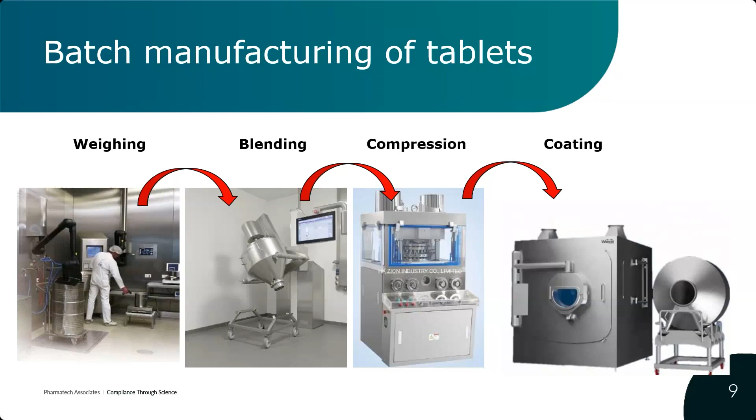And then after the coating, the final release tests will happen that release the product to go to the packaging area. Now, in some circumstances, it is possible that there are flow issues or segregation issues.

And in that case, a dry granulation or roller compaction step is often added, where the powder mix goes between two very big rolls that press the powder together and create a ribbon that is formed. This ribbon falls apart into flakes that can be milled to the correct particle size distribution.

If the blend has compression issues as well, a wet instead of a dry granulation step could be done to create flowable granules with good compressing behavior, and after that it can go to the milling step again. Like that, well flowable granules are being shaped and formed, and this should give good compressing behavior.

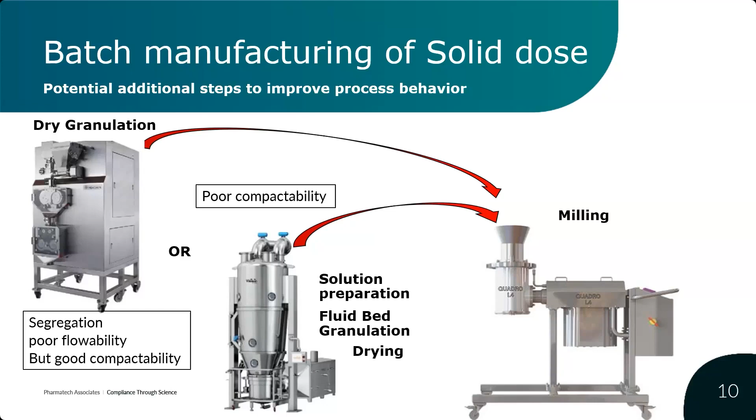Now, between all these steps, there's many days of testing needed. There's a lot of work to move the material around and handle the batch records. There's space needed for the storage of all the materials, and a lot of handling and transportation going on. So the cycle time of a complete batch process is very long to make solids, and it can be very cumbersome and expensive as a process as well.

Now, just imagine that if you could combine all these machines together into one large equipment train, you connect all these unit operations, you would be able to feed in all the material on one side of the line, and you would take out all the finished products on the other side in one go.

So you would not have intermediate storage. You would not have to test in between all the time. You would not have all those batch records. You only have one batch record at the end of the process.

And your batch size would then be defined not by the size of the equipment, but by the duration of the run. And that would be very beneficial. It would mean that you could define yourself how long you can run. You can make very large batches, very short batches, and it would all use the same parameter settings, which means that if you scale from your development into your commercial manufacturing, you would not have to change any parameters.

Also, during development, instead of having to make a new batch with each set of parameters that you want to test during your design of experiments, you just have to run very shortly. You can switch over to your next set just on the fly, and like that can do very fast and easy design of experiment sets with a very limited amount of material.

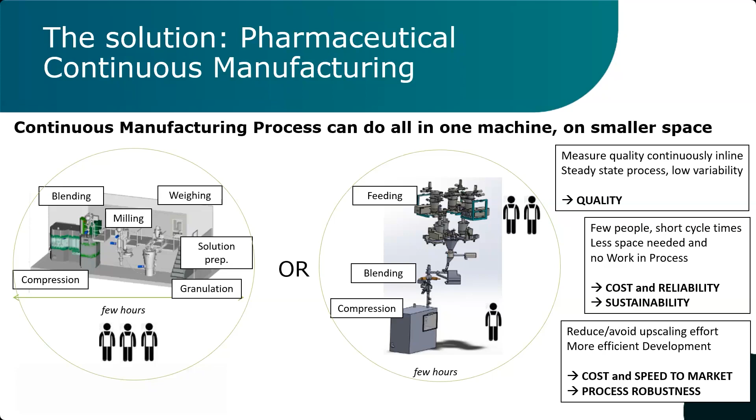That sounds wonderful. So in oral solid dosage, we have really seen that the facility size can be reduced significantly. And what you said, Lawrence, about faster time to market, I think that's also relevant for generics because of the exclusivity period. And if you're able to go to market sooner, that has significant economic implications.

When we look at the real differences between CM and batch, we already saw that in batch we have these individual unit operations and equipment, and you move your entire material one at a time through those unit operations. And we also saw a continuous line wherein the material flows from one end into the other. So definitely there is a sense of continuity in the material movement.

But if we go by the official definition, which the regulatory agencies have harmonized, a continuous manufacturing process only needs to have a minimum of two unit operations which are connected together and material flowing between them. So that means that a lot of the semi-continuous or so-called semi-continuous processes can also be considered as continuous manufacturing operations when you have multiple unit operations which are still being operated in batch.

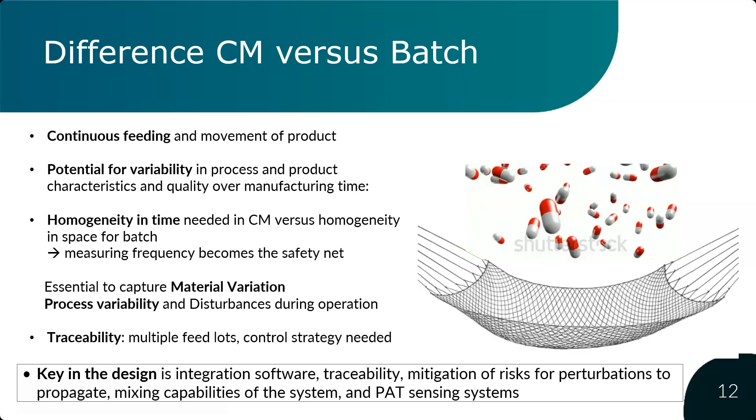When we look at the potential sources of variation, this could be a longer list, and this is a subset. It's very interesting because some of these sources of variation we don't have to worry about in big batch equipment. So you have incoming material feed, and you may have excipient batches coming from different vendors, or even different batches or lots of the same excipient, with minor variations in bulk density or particle size distribution.

To mitigate this, I heard one of the companies mixes 5 incoming lots together and homogenizes it, then feeds it into their feeders. That's an interesting approach they apply, but it depends on your material, what kind of approach you want to take.

Then there can be special causes for that variation. For example, electrostatic behavior is critical in powder flow. If the powder is very electrostatic, it makes it difficult for it to flow, and we'll see some of the effects later on. Also humidity. In powders, it's very interesting - powders can behave like solids, they can behave like fluids and flow, and they can also behave like gases, as in they can fluidize. Humidity has tremendous impact on that.

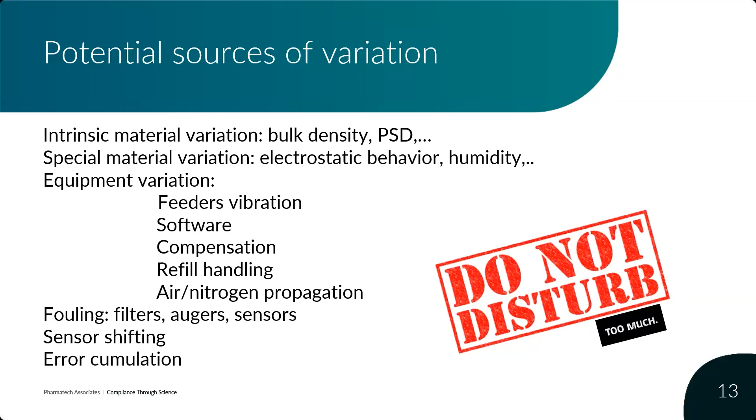Now, hearing Atul talk about the variation of a system, it becomes clear that feeding is the most important source of variation in the continuous manufacturing process, as it is the start of everything. But feeding is never perfect, and variation will always occur because you work with augers, because of the variation of materials, because feeders are moving and vibrating on top of very sensitive weigh cells, and because feeder hoppers need to be refilled regularly, so the weigh cells need to stop working

until the system is stable again. And so the measuring frequency and the averaging of the data that comes from the feeder by the weigh cells and by the software becomes very, very important, because if the averaging or the frequency is too long or too late, then the real fluctuations can be missed completely, and it can give a completely false idea that you would think it's constantly dosing, but in reality it is not.

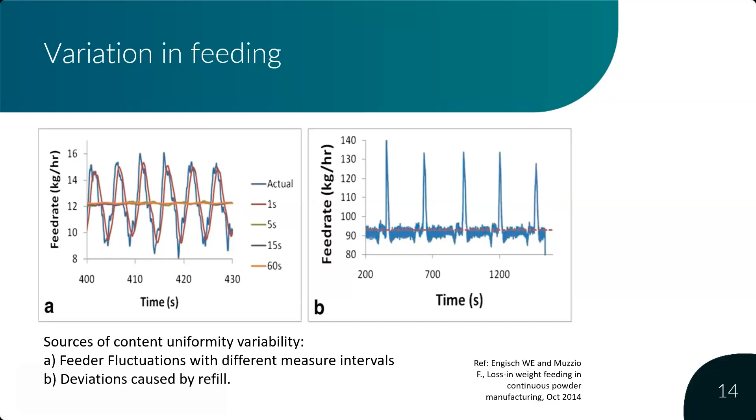Now, an overshoot of API from a feeder could end up in a tablet a few minutes later and potentially can damage the health of a patient. And so something needs to be done to mix all the ingredients and to minimize the impact of all this variation. All the time, in every continuous manufacturing application, an inline blender is installed.

Now, more mixing of that blender means blending out variation better, but it also spreads out more, so it will take longer to wash variations out. That's also not always ideal. So to find an optimum, the mixing capability of the blender for every formulation needs to be well understood.

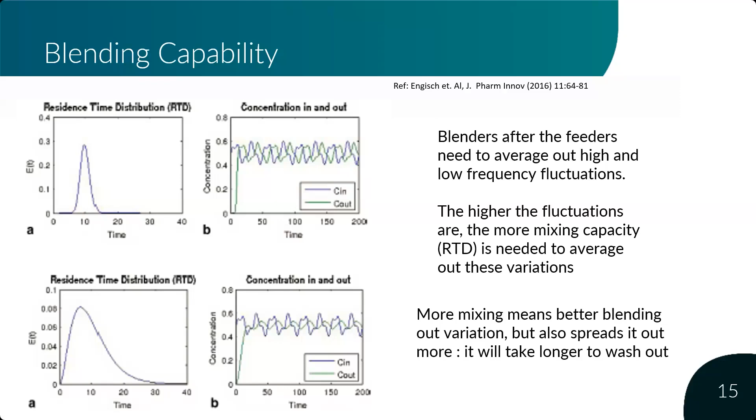And for that, how we do it, we call in a concept that is called residence time distribution, or RTD. Now, RTD is a probability function, a distribution function of the time that particles need to move through a section of the line. That describes how a particle behaves inside the reactor. First it's defined theoretically, and then it will be tested with experiments that prove the theoretical curve corresponds to reality. That's how it's done.

Now, after defining the RTD like this for an individual unit operation. Lawrence, before you move forward, I do have a question. Yes, Gabriela? Related to the tracer - what would happen if you do not use a good tracer? Yeah, that's the previous slide. It's a good question.

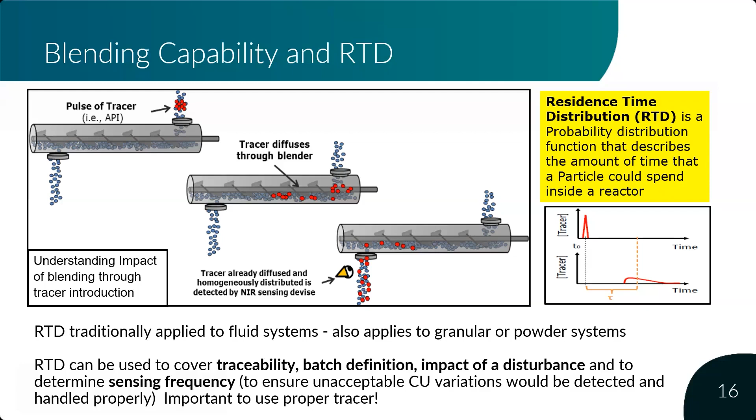Once you've done the RTD calculation for a blender, you can also do that for your compression machine, for other blenders, for other parts of your line, even a tube where material passes through. And then you're going to bring all of those RTD models together into a full line RTD. This will give you an understanding of how variation or disturbances propagate through the line from the beginning all the way to the end.

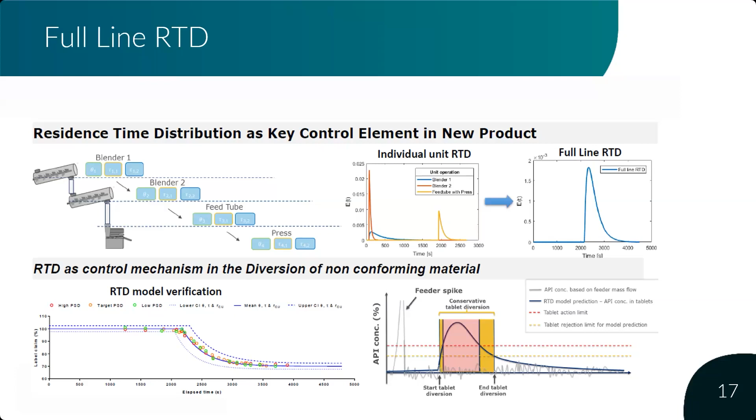All of this will give you a lot of information. It can help you detect a disturbance and know exactly when you need to open up your reject valve further down the line. It can also help you, if you find an out of specification result at the end of the line, to trace that back all the way to your individual sublots of excipients or API used at the beginning of your process. And it can help you identify what needs to be the sampling frequency, or the measuring speed, for other sensors in your line to assure you can capture all the variation of your process.

So what can go wrong in a typical CM train when we look at just the feeding unit operation? These are some good pictures that really demonstrate what can go wrong.

There are powder flow issues, as we all know. In a feeder, typically we have a screw auger that is conveying the material out of a hopper. And if the material is too sticky and it sticks to either the auger or the walls of the feeder, it can create challenges. So you could have clogging, you could have obstruction to the flow.

The properties of the material, such as cohesive properties or electrostatics, particle size distribution, and surface energy, are measurements or properties that impact electrostatic or cohesive behavior. These can create phenomena you see here, such as bearding of the material, creating a beard-like thing - I call it the Santa Claus beard - out of the feeder outlet. Or it can create rat holes, where the material is sticking around and you have an empty space in between, with nothing flowing out. You could also have material that coats.

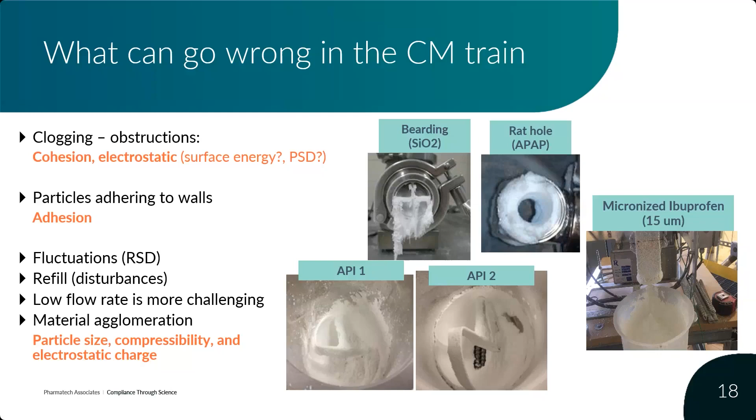Material can also agglomerate. This is why proper characterization of material properties is so critical, and material characterization is an important element of control strategy for any process. Knowing our material is extremely important, because these flow issues can really make or break a continuous manufacturing process.

So how do we solve these? There are solutions available for each of these flow issues. We have to fundamentally understand our material and the equipment we're using, and the interplay between that material and the equipment.

We have many solutions. You already saw some agitators in feeders that are there to make material flow. And I'll tell you a funny story - I've seen a hammer often used in some companies, jokingly called the GMP hammer. That hammer is used to hammer down on the vessel to make the material flow or powder fall. But we have to be careful about all these solutions, if they introduce any variability due to vibrations.

So we have other devices like outlet screens, agitators, impactors, and vibration units, special types of hoppers. And then you can also make a few changes to the material itself to make it flow better - you could deionize it, you could have special coatings on it, and so on.

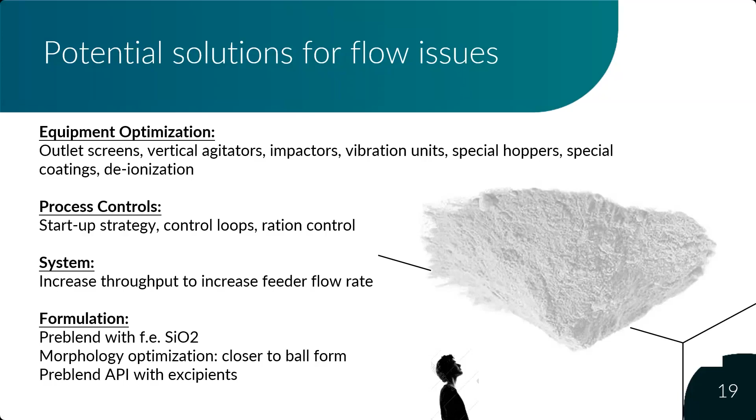Now, one specific issue that influences material flow is electric charging, and that's specific because it can change over time, and it's dependent on a lot of other factors as well. The effects are well known since a very long time. Even 50 years ago, a scientist called Gibson published an article that showed under which conditions there is less or more charge buildup in a dynamic powder environment.

That table shows, for instance, that there's a lot more charging that happens during pneumatic conveying of particles, because those particles typically rub more against each other than against the wall of the equipment, and that gives the most charge, or more charge, according to Gibson. That's surprising, because you would think milling would be a lot more impactful at first sight than pneumatic conveying, but according to his calculations and experiments, that was not the case.

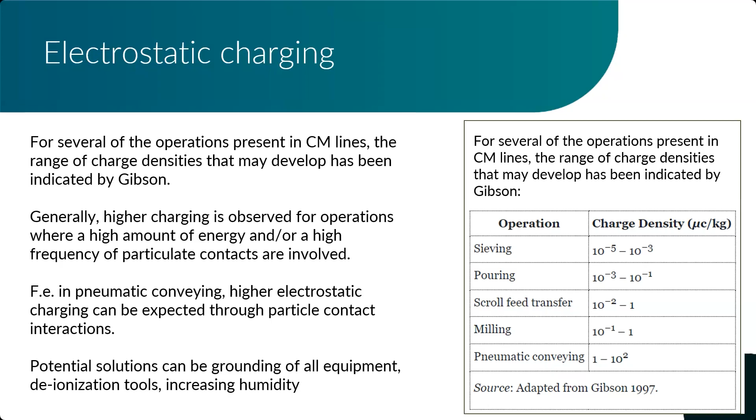Now, overall, with everything said about variability, we can conclude that you create a robust process if you're able to have full reliability under different conditions with different disturbances. Your capability to handle variation is what drives your robustness in a continuous manufacturing process, and it's basically the ability to achieve acceptable limits. In reality, that's often measured with things called process capability, CPK, or process performance, PPK.

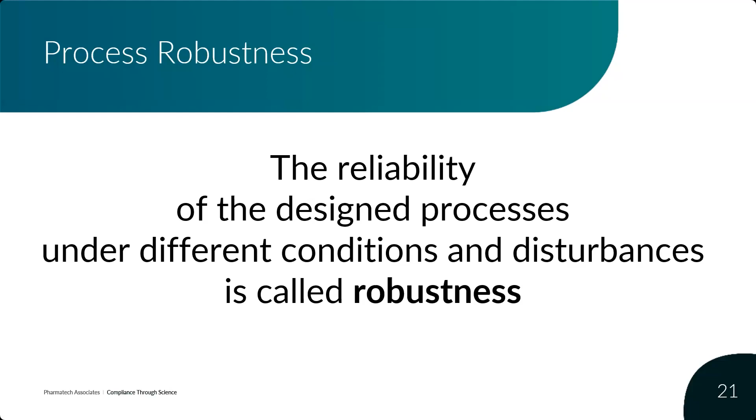So to ensure our quality, we need to have a control strategy, and we need to demonstrate that we have a solid control strategy. What goes into the control strategy? As we can see intuitively, I already mentioned that you need to understand your materials, and that goes into your control strategy. We also need to understand our equipment, what kind of equipment design we have.

There are several types of feeders available. There are different types of continuous blenders available, and they have different blade designs, etc. So we need to understand that, and then what kind of impact those blades would have on the material, how shear sensitive our material is, and all of that matters and has implications on the product quality. All of that also goes into the assessment of the risk when you carry out these operations.

So we need to understand, say, what is the range of my impeller speeds that I can work within. When I look at each equipment and each unit operation, and try to understand the range within which I can operate, I tend to create what I call parametric control, or the design space. So you have your parameters for every unit operation. Sometimes, because this is a connected process, those parameters affect each other. So instead of having a range for each parameter, it's better to have a design space within which we know our process is going to behave the way we want it to behave.

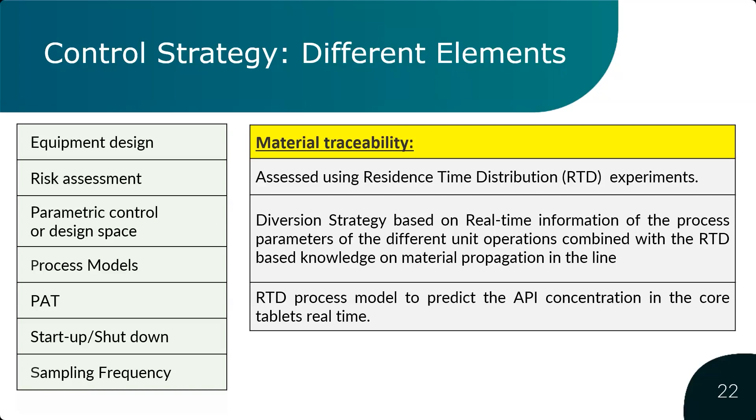If you remember earlier on, I mentioned that I have seen some setups where everything is mounted on metallic platforms. So when you walk on them, there are vibrations, and there are stairs to go up and down. So it's important to engineer out these sources of variation.

So when you are designing this facility, you want to make sure that variations due to people walking or anything falling down on the floor, etc., those vibrations are well understood.

And then equipment dimensioning, depending on the kind of feed rate ranges we want to work with - whether we want to create at 25 kilos an hour or at 110 kilos an hour. So we need to make sure our equipment is appropriately dimensioned.

And there may be certain unit operations which may be in batch mode. For example, drying is often done in batch. So we need to make sure that we dimension our dryers accordingly, depending on the load.

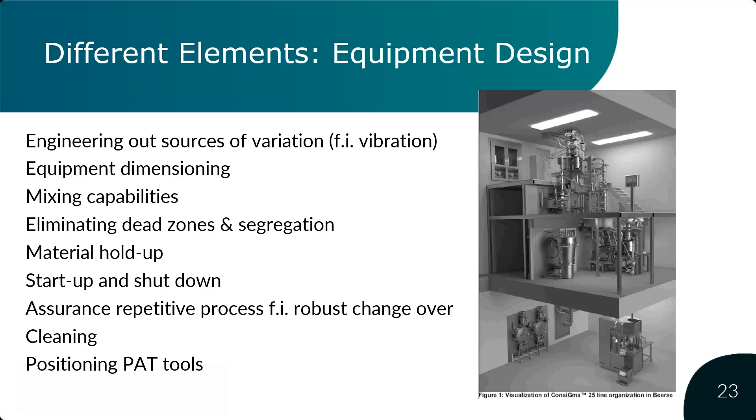Quality by design starts with understanding the risks and then mitigating them. In continuous manufacturing processes, we start just like that - we first do a risk assessment, and we do criticality analysis. This gives us an overview of what will be the overall design criteria.

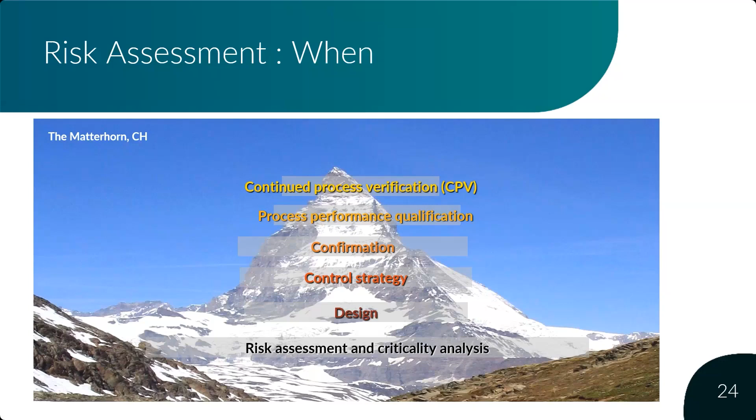Then we build a control strategy, and in the next stage we do a confirmation. The settings are frozen, validated in a PPQ phase, and then once we run commercially, it's possible to use CPV, or continued process verification, to assure with trending data, etc., that the process remains under control over time.

Now, after the initial mitigations, there will be a number of iterations. So we need to do that risk assessment a number of times until all the high and medium risks are resolved. Only then have we really finalized the critical process parameters and critical material attributes, because until we have mitigated all the risks, they still might need to be changed. So that's how you do it.

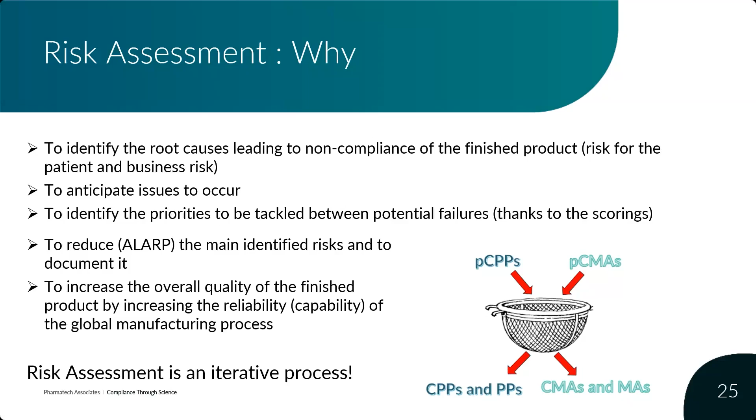And the lower your risks, the higher the reliability of your process. Now, the CPPs can be set as a range, as Atul said earlier, or they can be set as a design space. What's the difference? In the conventional way, you defined two values for every CPP, and the process needed to stay in between there. That's a parametric setup.

Those two values are always fixed. Now, in case of parameters that are dependent on other parameters, those two values might change. They might become larger at certain moments, which gives you an opportunity to run your process at different or additional points. But in reality, for the parametric approach, you keep it at the worst case, so you do not take advantage of that opportunity.

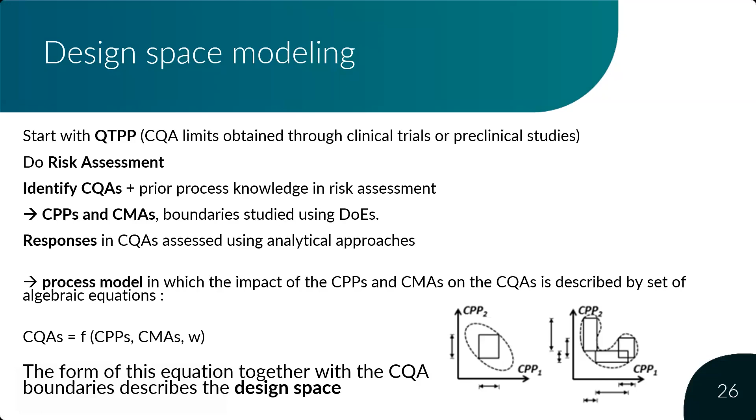But if you make them interdependent, you can create a design space which is set by algebraic equations and gives you a completely different shape. You see that the elliptic forms or different shapes give you more area where you can maneuver, and in reality that means you have more area to maneuver for the same amount of variation, which gives you a better yield for your process.

So like I said earlier, material characterization is critical for the process to succeed. The goal here is to make sure we quantify the properties and their effect on process and product performance. So what are we trying to characterize here? I'll be brief. We're dealing with powders, so essentially we want to look at the bulk density.

And sometimes it can be looked at in two ways. One is your tap density, wherein you tap the material and see what it is, and otherwise it's just the normal density. Particle size distribution has tremendous impact on flow properties potentially, so it's important to understand what particle size distribution we have in each of the components. We know that particle morphology, like I mentioned earlier, we want to eliminate needle-shaped particles as much as possible to make sure they flow well.

So morphology is also important. There are also tools available to measure things like electrostatic behavior. In fact, USP is coming up with a new general chapter soon on electrostatics and also on wettability, because in wet granulation processes, wettability is important. And then compressibility, using a compaction simulator - that's another new general chapter USP is coming up with. It's important that your material is compressible to the degree you want, with no undue behaviors once it's compressed.

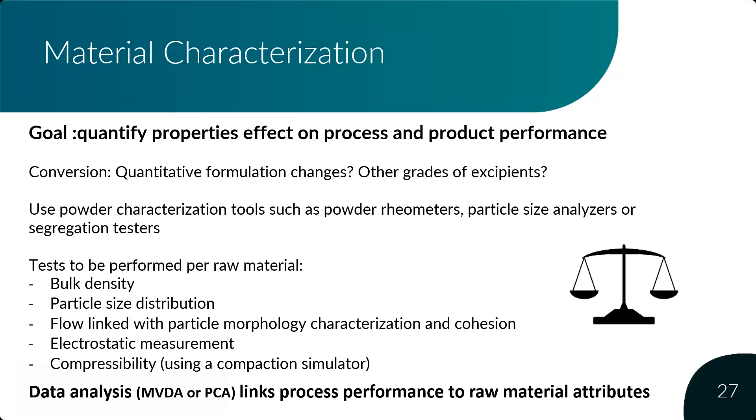So there are tools available to characterize all of these parameters. And once you have all of this data coming out from your analytical tools, you can perform data analysis and link the material behavior and material attributes to your process performance.

Then we come to equipment characterization. There are processes or tools available to characterize each unit operation in detail, so we can characterize feeders - how they are working - and we can characterize blenders. The lubrication, at what point do we add the lubricant, is critical sometimes, because if you over-lubricate your blend by adding lubricant too early, that can have a dissolution impact on the bioavailability of your product.

And of course, during wet or dry granulation, we need to look at how the equipment is impacting the properties of the granules. So for intermediate materials such as granules, it's important to make sure we have the critical process and critical material properties down there. Compression also - there are simulators available that tell us how the material will respond to the punches hitting it from top and bottom, and what's going to happen to the particles within it.

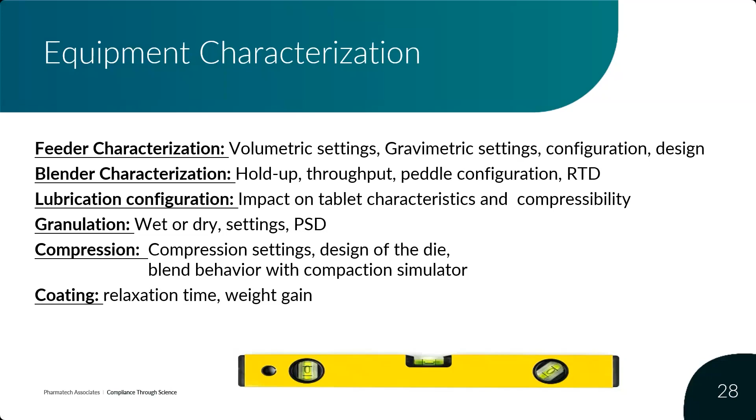Is there going to be any capping or other challenges? And when the tablets come out, are they friable or are they good? Do they need a relaxation time or not? All of those things are characterized along with the equipment. And finally, the coating - how much weight gain the tablets have due to coating, and is there variability intra-tablet, inter-tablet, or inter-batch? All of those can be characterized, and there are well-researched papers available for that.

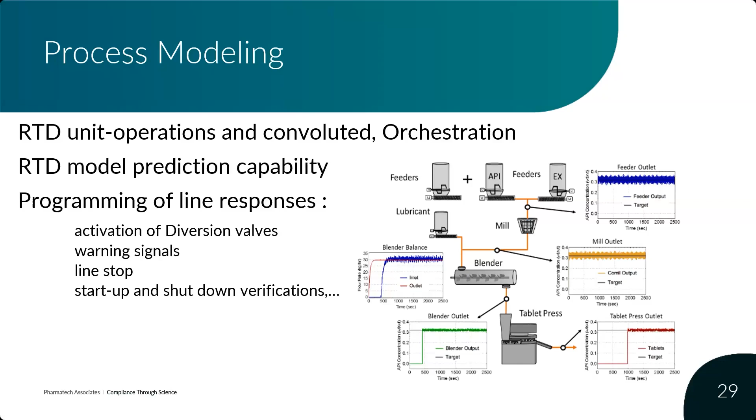So once you've done the material characterization, you start first with your risk assessment, then your material characterization, equipment characterization, and you have your RTD models defined. Then you bring all those RTD models together with the CPPs, which are in the meantime clear and fixed. You have your design spaces defined. You bring all of those aspects together and create a full process model, which informs how the line needs to react and respond depending on what happens with the product or process. Does a diversion valve need to open? Does part of the batch need to be rejected? Will the line stop? Does it just give an alarm? Your process model will also inform how it needs to perform startup and shutdown activities. Overall, we call that orchestration of your line. So that's what process modeling does.

And we talked about PAT earlier. Why do we need to use PAT? We need to use it so that we understand what's going on within our process. The aim is to understand variations in material properties early on, and then what's happening to the material as it's being transformed during the process.

So we have various probes in different unit operations measuring things like particle size, pressure, and temperature. Like I mentioned earlier, probes in feed frames look at content uniformity right before compression. And there are also probes in the outlet of the blender, for example, as Lawrence showed earlier.

So it's there to capture any variability or special cause variation that may happen because of an event we did not anticipate. It can also help us understand the natural variability that can happen when we change incoming lots of materials. So this data could feed, like I said earlier, into a process model or a machine learning model in the future. And that could essentially help us achieve real-time release by showing that we have control over the process at every step because of this data.

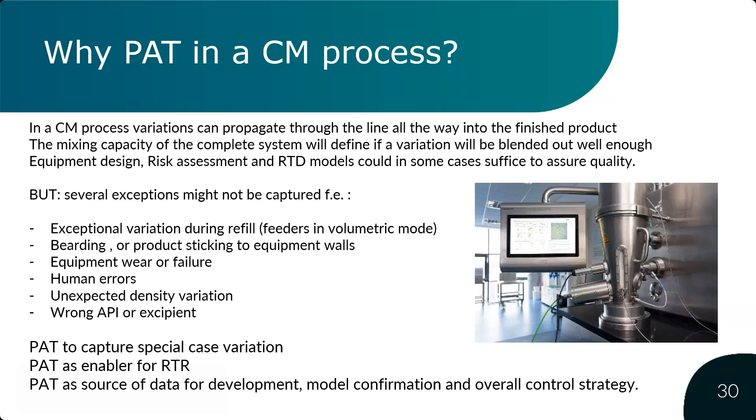So Atul, I do have a question here about the PAT equipment, because you're showing that it's being used in different stages of the process and life cycle. So how can PAT equipment further mature for the purpose of continuous manufacturing applications?

So the way I see it, the role of PAT equipment is to see and tell the operator what's going on within it. But sometimes that operator does not have to be human, it could be a soft sensor, it could be some kind of a model. So with PAT probes, what you look at is making sure that what they're able to sense and convey is the correct information. Sometimes because of repeated or elongated usage, you could have sensor fouling or sensor shifting.

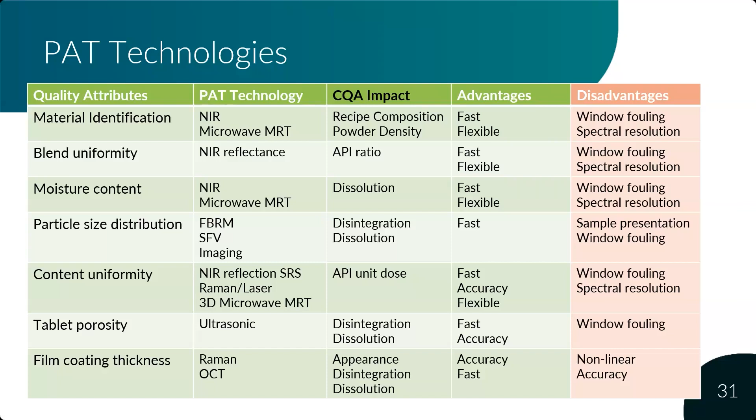And there are certain process parameters you have to worry about. For example, in blending, you would look at the impeller speed, etc. So all of those eventually feed into a more intelligent way of running your process.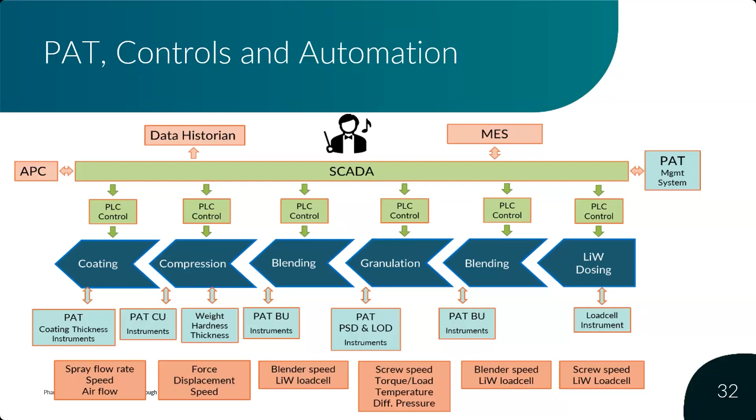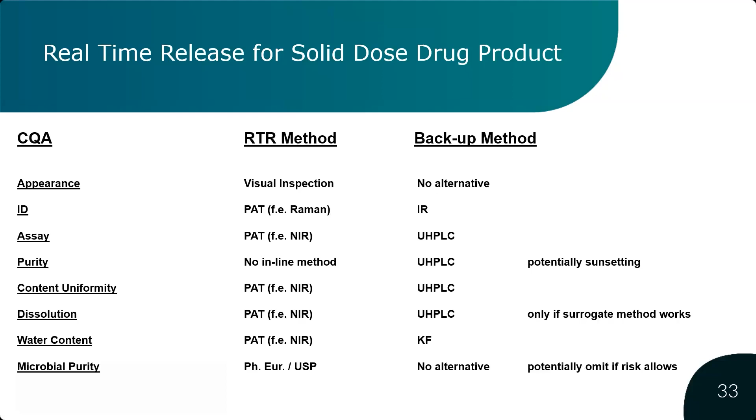Lawrence, do you want to elaborate a little bit more on that, or do we not have time? Yeah, I think we have to conclude in the meantime, Atul.

Thank you very much. As a conclusion, I think we may very well say that continuous manufacturing can really assure high quality in your manufacturing processes. The resolution with which you can look at the process using PAT, you can compare that with looking at the stars with a telescope instead of with binoculars or with the naked eye in conventional systems. So you can adjust your processes on the fly while you operate, keeping it in the sweet spot.

Experience also shows that continuous blending gives more homogeneous results, and twin screw granulation gives narrower particle size distribution compared with conventional systems. You can develop using QbD processes, making things more robust, and you can understand your processes a lot better with all the data you generate. Scaling becomes easier with lower risk, and manufacturing can happen with immediate measurement of your quality instead of measuring it afterwards and potentially having to reject the full batch. Summarized, with continuous manufacturing you can upgrade your resolution and get to the next level of quality.

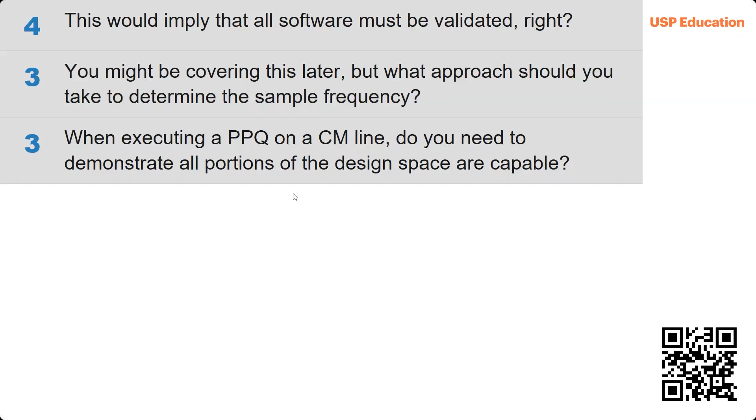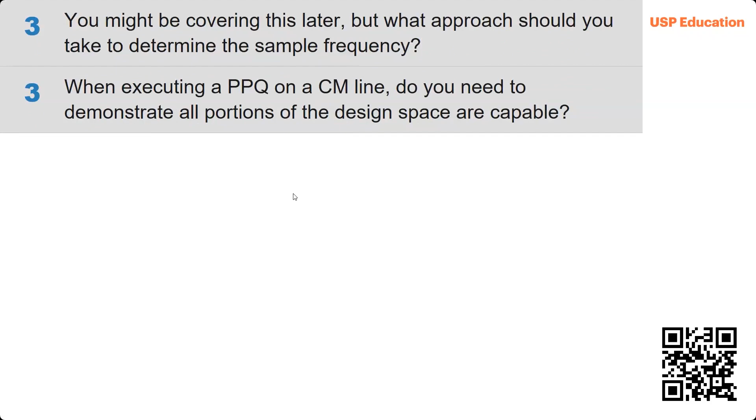The approach to determine the sampling frequency is what we explained there. With your RTD model or process model, you identify the duration and size of your peaks, and together with the blending capability of your line, you identify what potential variations you cannot capture or blend out with your blending capability. Those you need to capture. Your RTD informs you how wide and how high these variations can be, and your sampling frequency needs to be frequent enough to assure you capture them. Because if you sample less frequently than that, those variations might still impact your quality and might slip through your safety net.

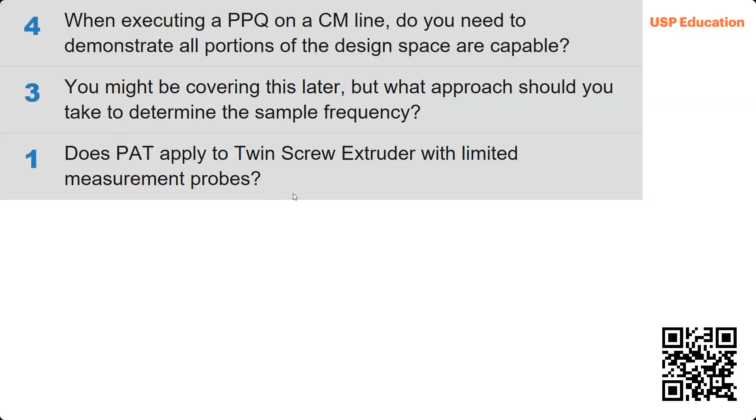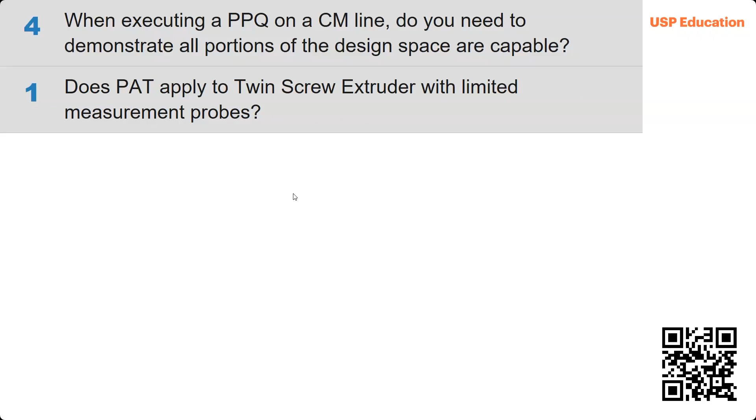Does PAT apply to the twin screw extruder with limited measurement probes? The PAT typically is used as well with twin screw after the drying stage, measuring the particle size distribution on one end and the humidity on the other end. Typically that's only done once it's already dried, because measuring with wet granules is a lot more difficult than with dry granules.

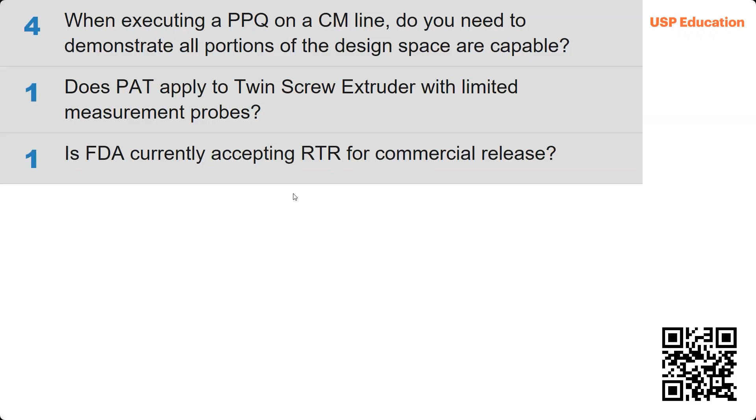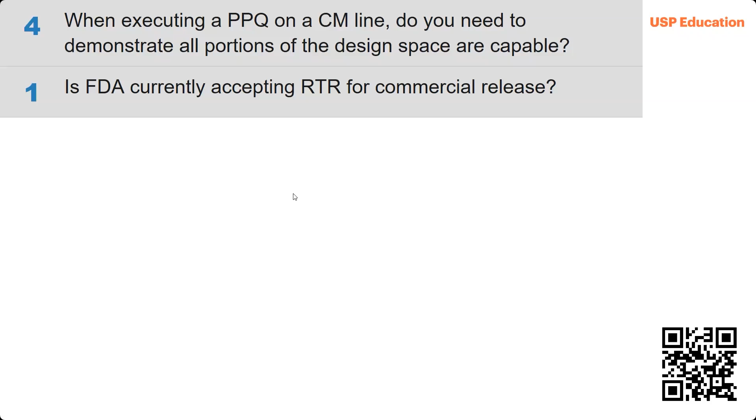FDA is accepting real-time release for commercial release. There are a few examples out there. The first product of Vertex is full real-time release, and also Prezista of Janssen, which is a batch to continuous conversion, was initially accepted with real-time release only for assay and ID, and afterwards also including dissolution. So the full package of real-time release aspects was accepted there. So yes, FDA is accepting real-time release for commercial purposes as well.

When we execute a PPQ on a CM line, do we need to demonstrate all portions of the design space are capable? With a PPQ, you do not need to prove your boundaries. You need to run at your process settings. You need to prove your design space earlier down the road, in earlier stages of your development.